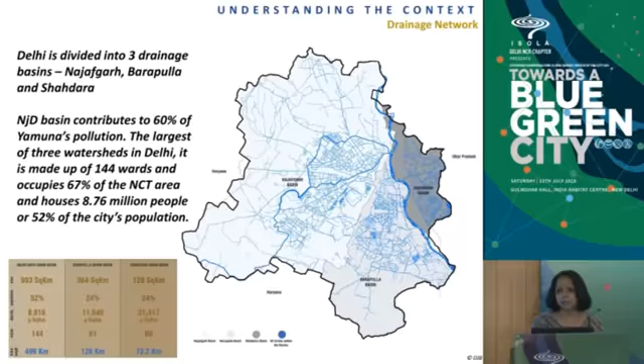It houses 52% of Delhi's population and about 67% of the area of the NCT. It's massive. Looking at water bodies, there were over 1,000 water bodies. Now they're down to about 960, maybe a few less as we speak. Some of these are dry. Most of them have sewage in them. But the hydrology of all of these essentially has been destroyed because of unplanned urbanization.

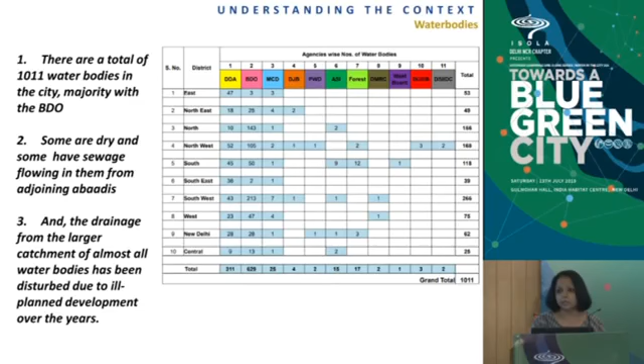You look at the ownerships, there are about 11 different agencies that own these water bodies. And water bodies in the context of India are treated as land. It's not an asset. Jiski zameen, uska water body, right? So it does not depend on whether it's your mandate to maintain a water body, it would be there because it's your land. Most of it is with the BDO or the Block Development Officer in Delhi, which means it's with the Rural Department, Rural Development Board of the city.

Issues consistent across scales. We are looking at poor water quality, of course, with high contamination levels. The main reason for that is 45% of Delhi is currently unsewered. So based on the local natural hydrology, all the sewage flows through the stormwater drains into the larger catchments, finally into the Yamuna. Sustained solid waste deposit, sustained sludge deposit. There is historical sludge that has been collecting in all of these water bodies and drains over years. Whatever dredging does happen during the monsoon is only to alleviate flooding, but not to restore the health of a water body. And of course, regular inflow of septic.

So you would often find, if you go walking along drains, which I'm sure you don't, if you did, you would see tractors pouring out septic into these drains very, very regularly.

There is a larger issue. While these are physical issues, there is a larger issue of a sustained degradation of the economic, ecological, and social value of these natural assets, leading to a larger problem which is affecting millions of Delhi's residents, which is that of sustained lowering of quality of life. If you would imagine, all marginalized communities are living along the beds of these drains and water bodies, and the impact is phenomenal, environmental and health impact for the city. It also comes at an economic cost.

So what was the vision? Delhi Jal Board wanted to restore and rejuvenate all drains and water bodies in the city, not a small task. It wanted to restore its ecological value, economic value, and put in place management regimes that were sustainable over time. By doing that, it hoped that it would create public assets across the city that would not only augment the amount of public open space that was there, but also enhance mobility and also enhance biodiversity across the city.

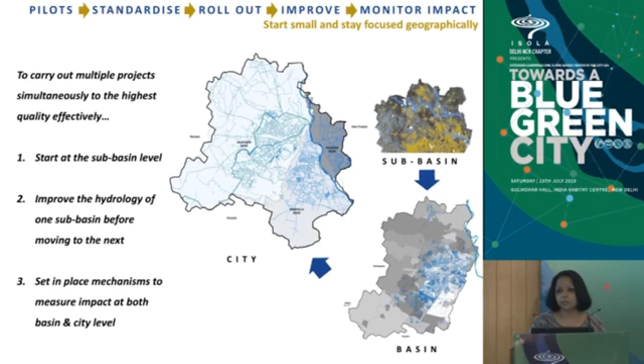The other thing that we did was we realized we needed experts. We needed to collaborate. All such projects need as many hands on deck as possible. So we said we are an in-house team. Let's do pilots. Let's set standards. Let's use our expertise of being in the government sector to set brief scope of work, write robust scopes of work in RFPs, and review and monitor. Let's get the best in the field to actually come and do the work.

So we started the process of actually creating an empanelment of landscape architects. These were multidisciplinary consortia with agencies which could help and purify water through bioremediation. So these were joint ventures with landscape architects and such technology teams. These were the people who we were hoping would actually get down to doing the designs, the tenders, the DPRs, which would get rolled out. We didn't have data. Getting a total station survey to be done through the Delhi Jal Board could take 3 months to get the file approved, et cetera. So we said, let's get a panel of surveyors on board so that all the data could be collected continually for all the water bodies and drains.

We partnered with the Irrigation and Flood Control Department. They are sort of the implementing agencies for all works under the Rural Development Board. So they are like the CPWD for Rural Development Board. They would build your baraat ghar also, and they would also restore your drains. So we said, let's work with them. Let's sort of do capacity building for both Delhi Jal Board and the Irrigation Flood Control Department.

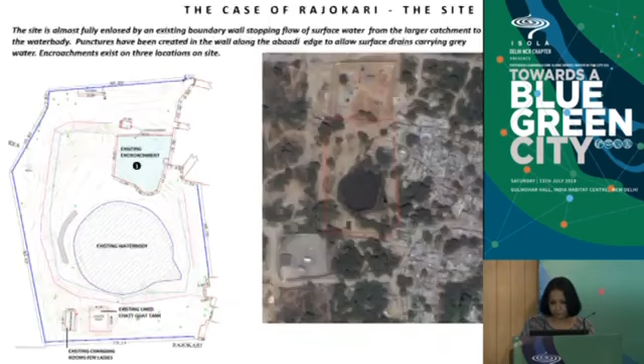So that's the first pilot that we did. It's Rajokari, it's done. I would request you all to go and visit it. It can be taken as a typical water body adjacent to an abadi. In most of these rural settlements, there are about 4 to 5 water bodies in each abadi. That's how the natural drainage system works, natural catchment works. So this was one such water body there.

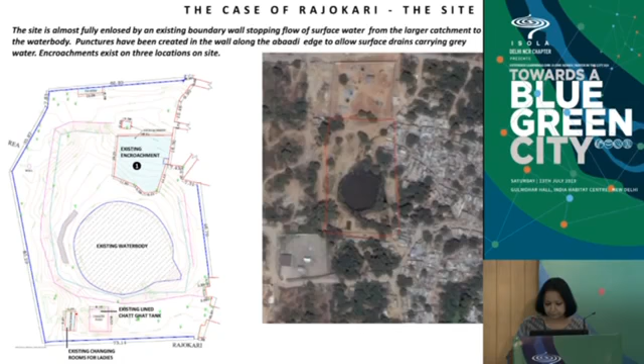Again, consistent issues. You have encroachment, you have sludge, you have general disrepair, neglect, no sense of civic pride at all. Some of these have become hotspots of crime, etc. There were no issues of crime in Rajokari, but in other cases there have been.

So the in-house team of landscape architects within the Delhi Jal Board, this is Yusuf and Madhu, actually put together a proposal. The idea was to design it as a wetland park with enhanced capacity for monsoon flows. And the other thing that we realized in public sector works, the costs were very, very important. So we had to keep the costs down, very basic.

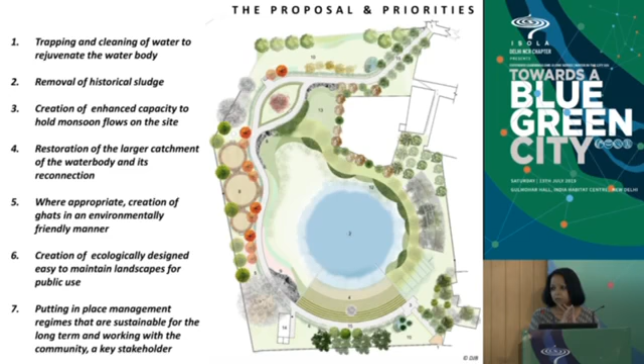So this was including the water treatment, and this was water treatment through bioremediation. Here is a constructed wetland based on a phytorid system. And so the entire cost for a 1 hectare site, including 0.5 MGD of wastewater treatment, was 2 CR. So it's literally half of it for water, half of it for landscape. So this was very robust landscape, but basic, easy to maintain, easy to deliver, cost-efficient stuff.

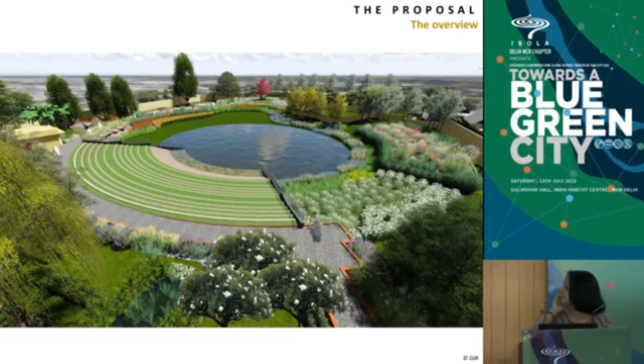And each piece of the stone was a different size. All the edges were chipped. And I felt really horrible as an architect, saying, what are we building? But at the end of the day, it does not matter. The chipped edges, I really don't care. When I see the place being used by the kids of the village where they had no public open space, it's all right. It's robust, it gets done. So I think that was a learning for me from the aesthetics point of view. As long as you get the overall structure right and it's working, you've got a win-win situation.

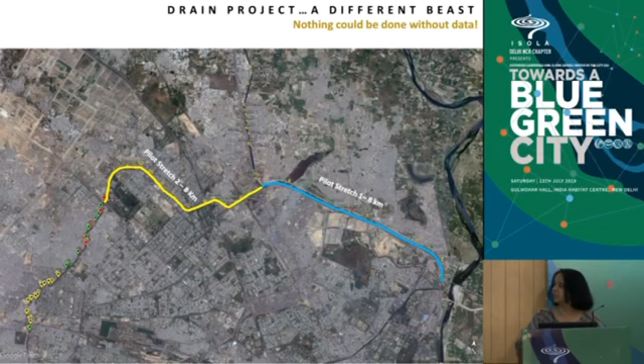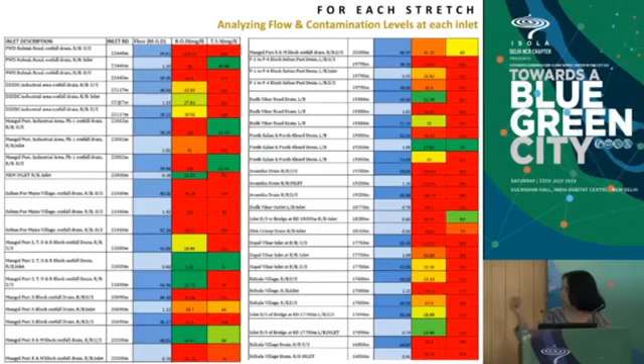He would walk every day, map all the drains. We would map all the inlets, photographic documentation. Then we actually got tests done for each of these inlets to map them. All this data was translated onto a GIS base so that we could actually tell which were the critical points to intervene in. Again, not very glamorous, but sludge and solid waste was the biggest thing that we had to

figure out. We didn't have any knowledge on how to manage sludge. Nobody knew, so we decided to figure out ourselves. We took out samples, we got them tested. Nobody knew how much it would cost, so we put labor on the ground. IFCD was brilliant that way, irrigation and flood control.

They actually put labor. They said, okay, itna waste hai. Let's take 10 labor. Let's buy bags ourselves. Let's figure out manual cost of actually managing that sludge. And we got a benchmark cost for how to manage sludge.

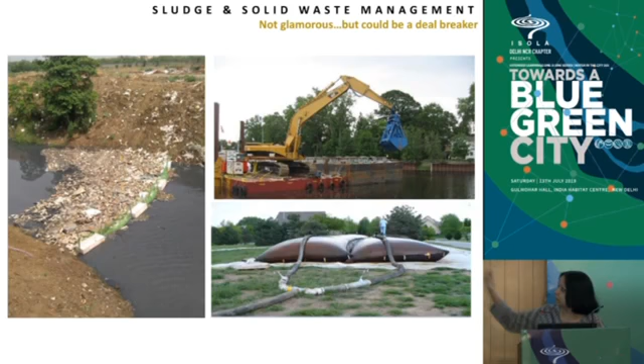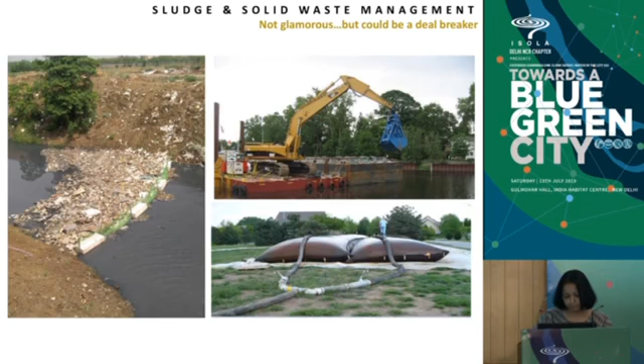This was installed very cheaply at 1,500 rupees a running meter, and it actually works across all the drains. This was designed by a young scientist and installed across all the drains within IFCD's jurisdiction. Then, based on the learnings of that, again, this design was done in-house with the Delhi Jal Board.

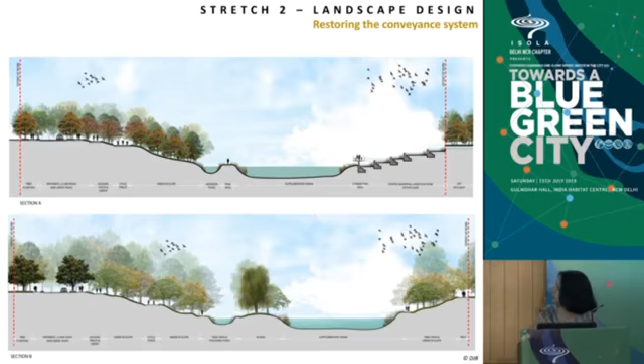In many ways, design is the easier part in this case because you need to sort out everything else to be able to do the design. Again, a lot of work went into actually calculating water capacities, etc. Unfortunately, nothing has been done of that yet. Again, we did a SOP for how to manage drains. This is a meatier one because a lot more issues to be dealt with.

I just want to get to the crux of the problem, and that's because there's no ownership, there's no accountability, there's no mandate for water bodies in the country. This is based on my research that I've done for the UVA. I'll just read out one little paragraph: although urban agglomerations continue to be the biggest polluters, cities and towns are not recognized as a significant unit for planning for water resources and management.

So if you look at planning policy from the national to the state levels, there is no mention of the city or the municipal boundary. Of course, it makes sense because you're working in basin levels, etc., but it misses out on a very important administrative function of where the maximum pollution is actually coming in. Nobody is looking at pollution and water at the city level. So things slip between stools when it comes to that.